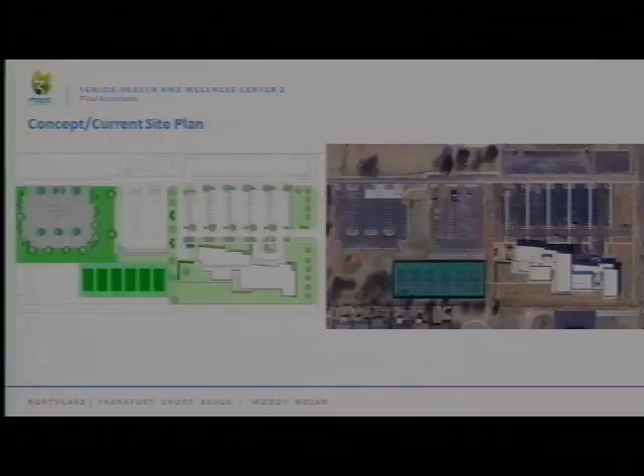Throughout the presentation today, I'm going to show a little bit of what our design was versus what the actualities were. You can see the building there on the lower right-hand side, the southeast corner, really giving it prominence to Walker and bringing it to the front of the east-west site. On the left side of the screen, you can see the tennis courts and the new parking lots that we're having to relocate and add as part of the project to make way for our new facility.

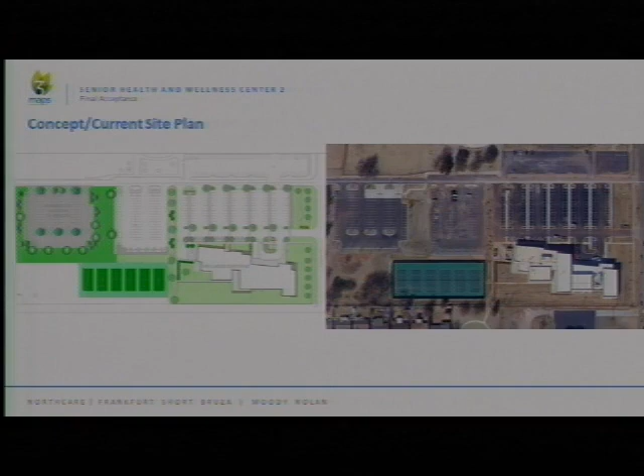This grand aerial view shows the totality of the property. A nice, inviting drive brings you up to the property.

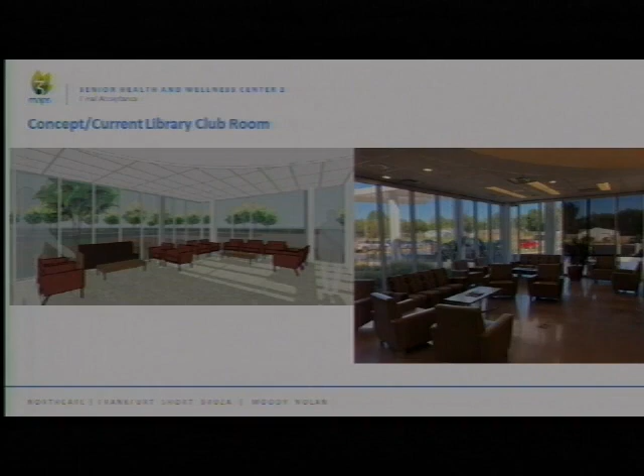When you walk in, this is the first thing you approach - the cafe. To the right of the cafe is a little cyber nook, so you can come use your computer, hang out in the club room right there, and all of that is off of the main lobby.

The main two-story space in the building is the cardio and workout facilities. You can see here the two-story running track on the upper level, and most of the heavy weights down on the ground floor.

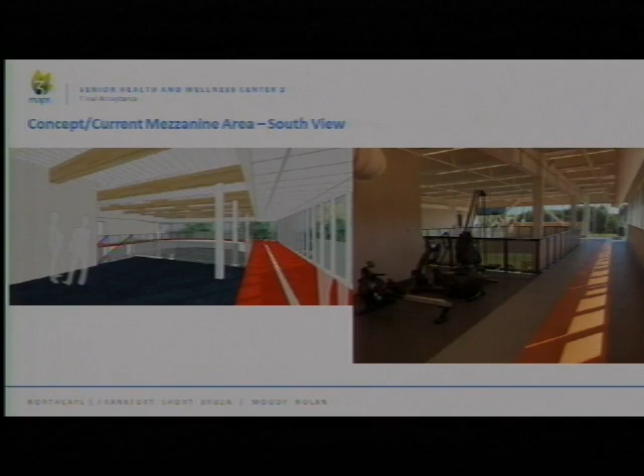Here's a good shot of that track overlooking the back grassy area. It really gives great views to the outside.

Overall, the total construction amount came in right under $11.4 million. We held our grand opening on the 4th.

With that, any questions? Really exciting project. Questions?

Just a comment, Tom. Yesterday at our subcommittee meeting, we learned from NorthCare about the grant they received. It's pretty exciting, right at $1 million, and it will provide transportation services and membership dues for folks 50 or older who are low income and want to go to that center. We also learned the medical part of the clinic is set to open on November 15th.

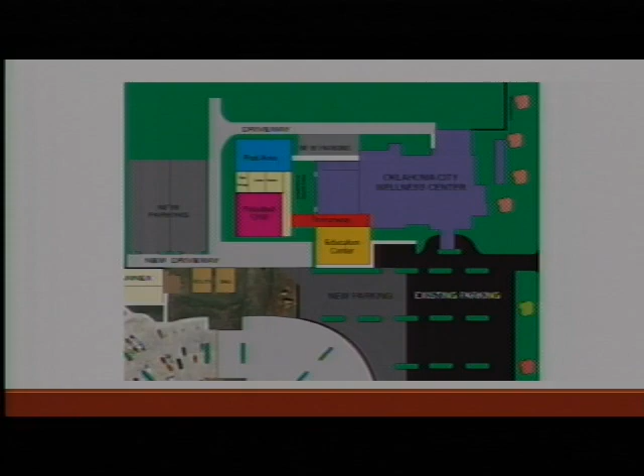This is just an up-close picture of the same, gives you a little bit of detail. We've also included an outdoor sports area for various uses, whether it's croquet or cornhole. I can't tell you how many times I've been hit up for cornhole games the last few weeks, now that the weather's nice. So that would provide another area too.

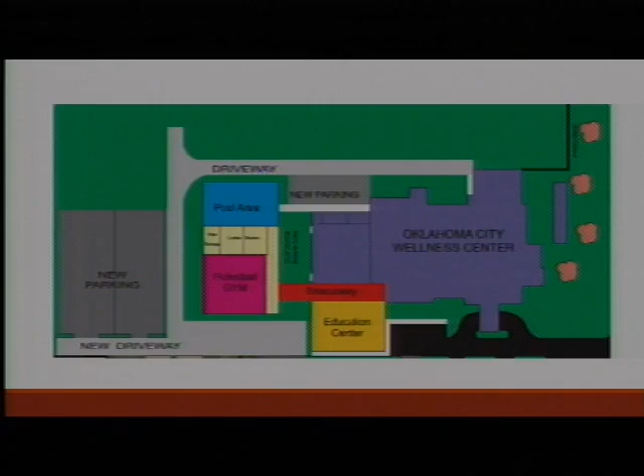So that is what we are considering and what we are respectfully asking your consideration of. I will have Bill Fleming, our chair of the board, come up and talk a little bit about budget.

Thank you, Mr. Chairman, board members, and staff. When we entered into this endeavor several years ago, our goal was to serve the community, and I think we've done that well, and hopefully increased the health of Oklahoma City in general.

The response to Wellness Center #1 has been absolutely amazing. I don't think anyone envisioned what would take place or happen out there. In order to continue the growth, we're going to have to expand the facility. You just saw Claire's presentation on what's happening right now. We're growing at the rate of a couple hundred people a month, and it will continue to grow. That age demographic is increasing, and so we will see more and more demand, I think, on all the wellness centers, and particularly in these zip codes there.

I wanted to share with you very quickly, because we do value your time, where we would spend the $3.5 million that we're requesting. First, we'd want to purchase additional land, and we budgeted approximately $650,000 for that purpose. I will tell you that the church has been approached by someone wanting to build senior housing there and offered $800,000 for that property, and I don't think we need that much property. We can scale that down.

We need to enlarge the parking lot. The original budget number for that, when we first looked at building the parking lot, was about $130,000. That did not include any of the soft costs, and of course, in 2 or 3 years' time, prices have gone up. So we budgeted that at $182,500.

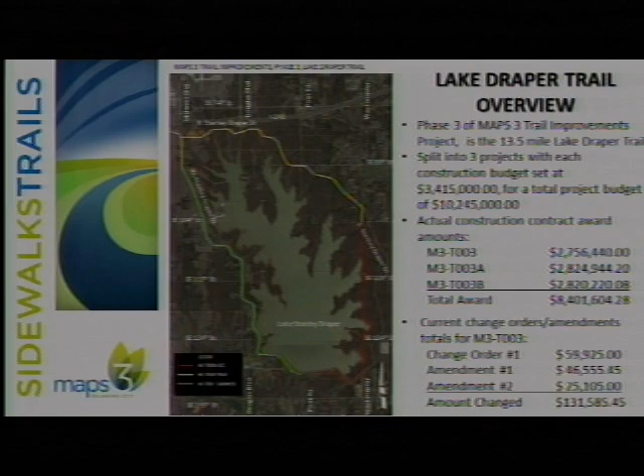Currently, for MAPS Trail M3-T003, the project we're responsible for, we've had a few minor additions and change orders, as shown on the slide. Change order number 1 and amendment number 1 primarily add a new parking facility, a new trailhead located near the marina area. Amendment number 2, as you'll see in a slide later on, addresses additional drainage issues we discovered below the dam after the recent rains in September, August, and now October. Those were primarily because the lake level has gotten a lot higher than when we originally did the survey. We did not realize there were areas of seepage created by the higher water level in the lake that we hadn't addressed. That's what you see with amendment number 2.

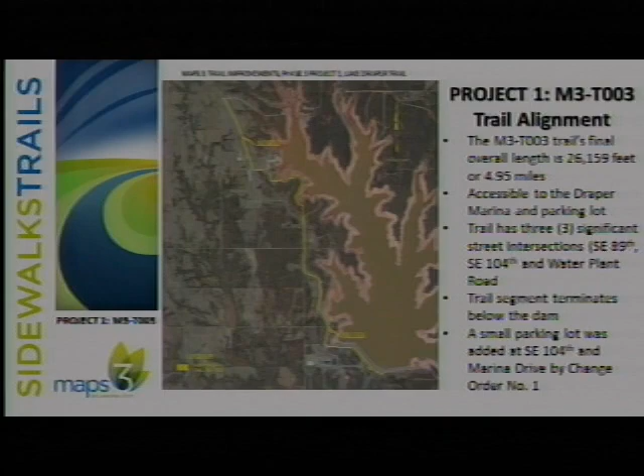So, a little bit about Trail T003: it is the westernmost part of Draper. It starts almost 5 miles, beginning around southeast 89th Street, and progresses south and west along the lake. It has 3 main street crossings: at 89th, southeast 104th, and at Water Plant Road near the dam. Our project terminates below the dam and will tie into CEC Corporation's project at the north end at 89th Street, and into Triad Design Group's project that's going through there. We're also adding a new parking lot with approximately 29 spaces, including 2 handicap spaces, with a connection point to the trail at that location.

The first segment I want to show some of the progress in construction really dates back to when we started doing rough grading back in March, right after the groundbreaking at that point in time.

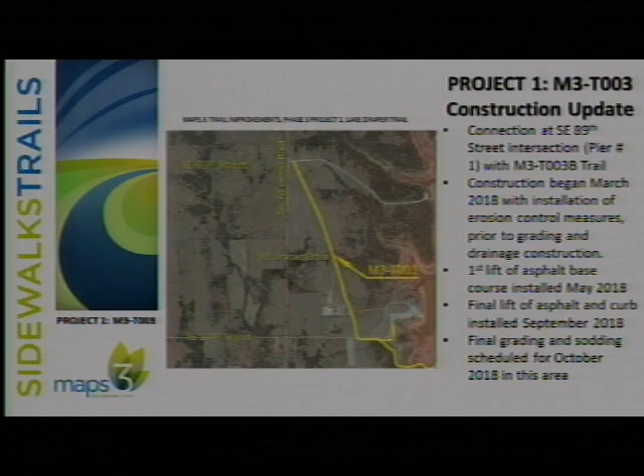Since that time, we've had asphalt laid in May. The final lift of asphalt and curbing on the trail was installed in September, and we look to have final grading and some sod laid down by the end of October now. As of this morning, our construction folks updated me, and based on the wet weather, we're delayed till probably Monday until we start to see some sod laid down adjacent to the trail, not on the trail, to finish that out.

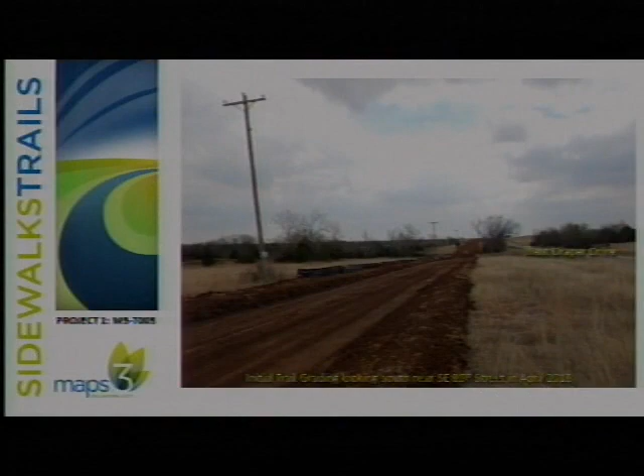What you see here on the right-hand side is West Draper Drive, and you see the proximity of the new trail, the rough grading as it looked back in April of this year. The next slide shows the first base course going down. You'll see the proximity of the trail gets a little bit closer to West Draper Drive.

This gets a little bit closer to the existing marina parking lot. You see the lake in the background, and this is a small spur connection from the existing parking lot, shared with the marina folks, that will spur back over to the main trail.

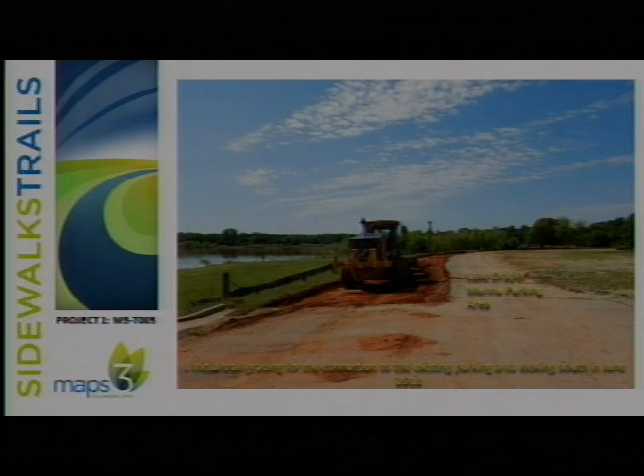The next is the section that the subcommittee had made a recommendation on, the trail alignment, getting a little bit closer to the lake in some areas.

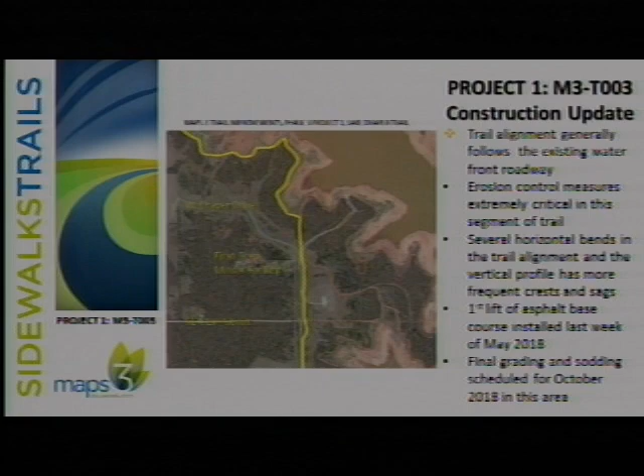In April and May, we did a lot of the grading and the first lift of asphalt. Since then, we're again on schedule for sodding, final grading to be done this month. This is a great look at how close the trail will be adjacent to the lake. This was taken in April, and you notice the lake level is down a little bit. Since that time, the lake has gotten back to its normal water pool elevation.

One of the items in change order number 1 was to add some additional riprap in a location very near this spot to protect against future erosion, if a north wind would create wave action that would erode the bank. So we added some riprap in a location to protect the trail from any future erosion and encroachment.

Again, the close proximity to the lake and the great views you'll be able to see once the trail is completed. This is the location where we had one of the drainage structures installed, near the access point to pier number 4. That was back in April.

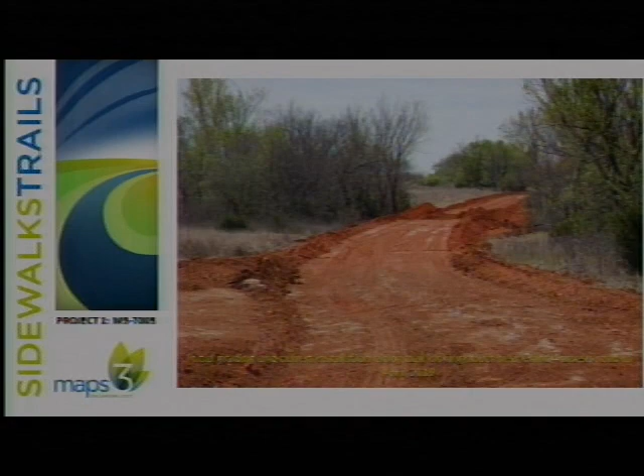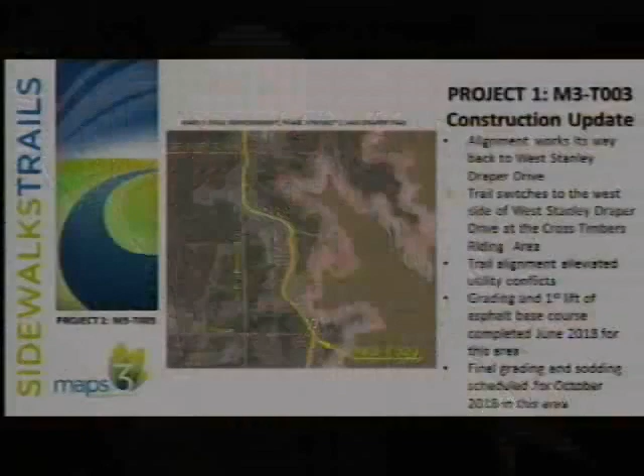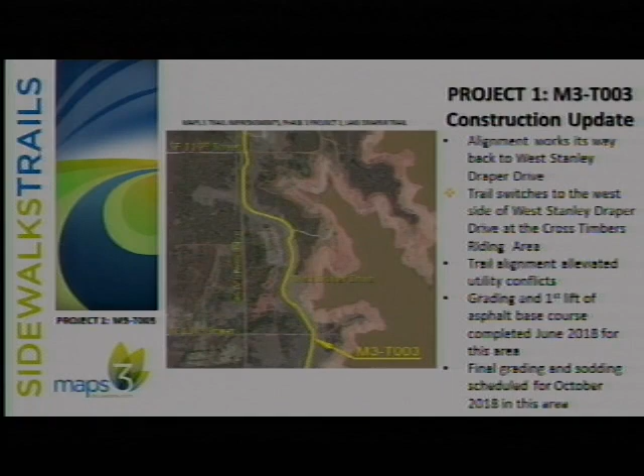The next section is where the trail goes across from the east side of Draper Drive to the west side near the Cross Timbers riding area. Based on the schedule, we look to be complete with final grading and sodding sometime this month through here.

One thing we were adamant about was adjusting the trail alignment to save trees and provide shade in some locations. This photo is a great example where we allowed the contractor and field representative a little leeway on the alignment. It didn't increase the project scope, but we were able to route the trail between some trees and have some meandering through this area near Cross Timbers.

You see the base course and erosion control up, and as we get a little closer, the trail is complete in that area with the exception of where we come up to the crossing at Draper Drive.

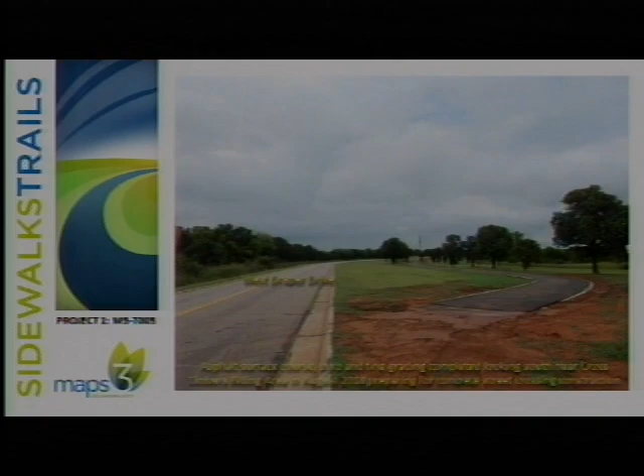One thing we want to emphasize at this Draper Drive crossing is the sightline distance back to the south and north. Trail riders have the opportunity to see traveling vehicles coming towards them as they prepare to cross Draper Drive. Likewise, vehicular drivers have a very good view to see approaching trail riders. We also have advance signing on both Draper Drive and the trail to notify everybody that a crossing is coming up at this location.

The last segment of our area is down near the treatment plant road, where we go below the dam. Most of this work is completed, as you can tell by the schedule.

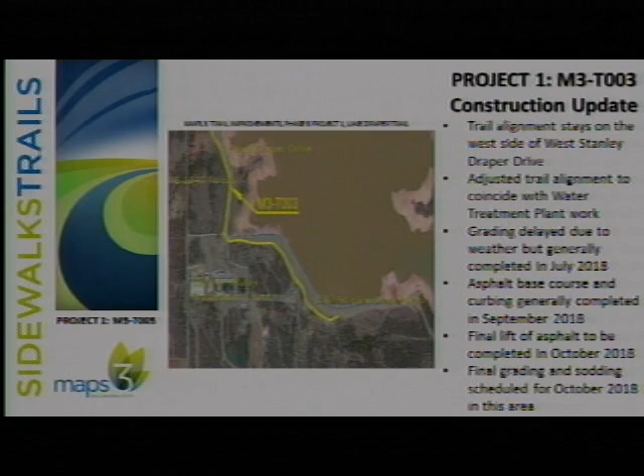Back in July, when it was still relatively dry before the August rains, you see the general layout of the alignment as it goes down below the dam. Then here in September, you notice all the water standing in the foreground with the trail base course already installed. The low spots were originally created with drains, cross drains there, and with the high lake level the hydrostatic pressure pushes water seeping underneath the dam, which is normal.

It's a normal function, I don't want to scare anybody. But we did find a couple of other locations where we thought it prudent to put cross drains underneath the trail and adjust the trail up slightly so we don't have a soft spot potentially developing whenever we have a high lake level.

Here you see it in September when it was a little drier, but in the far view of the picture you see where the construction equipment is working its way up out of the bottom below the dam, back towards the water treatment plant.

Final grading, ready for sod in this area, and it looks like next week is the anticipated construction phase for the sod to be placed.

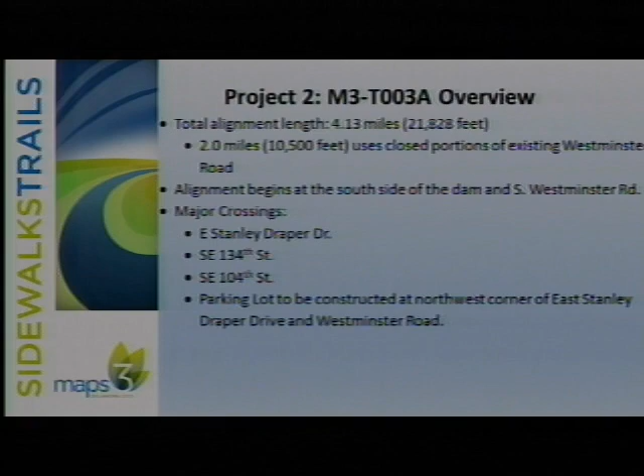Quick overview of the construction cost. The budget is $3.4 million. We are currently up to $2.9 million. We just recently processed an amendment and change order.

The amendment, well, both of these are primarily related to improvements to eliminate all occurrences of sheet flow over the trail. As originally designed, we had permitted small volumes of unconcentrated sheet flow to go across the trail. These changes raise the trail to some degree and create a bar ditch on the uphill side to capture that flow instead of letting it go across the trail, then transmit it to the nearest cross drain and then to the lake. So that will be a big improvement to the project.

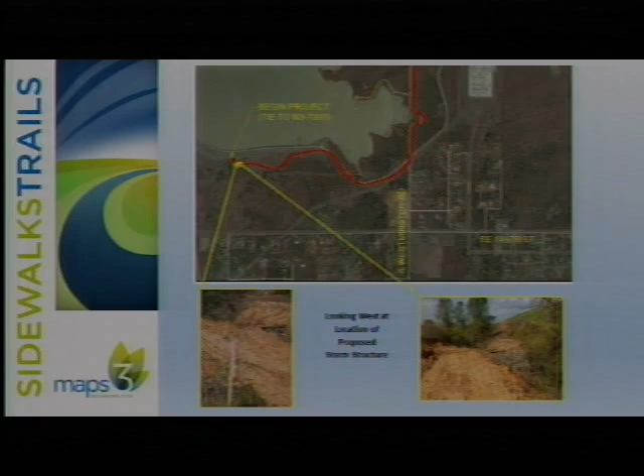We'll go through some pictures here. This is at the south side of the dam. These pictures are a couple weeks old now, so this is kind of rough. CPA has been focusing construction to the north of Stanley Draper Drive, doing a lot of work up there, which we'll see in a second. This is kind of rough grades where we would tie up to the next project.

Some more photos out on the south below the dam. You can see we have the parking lot there where it's going to be built eventually, at Westminster.

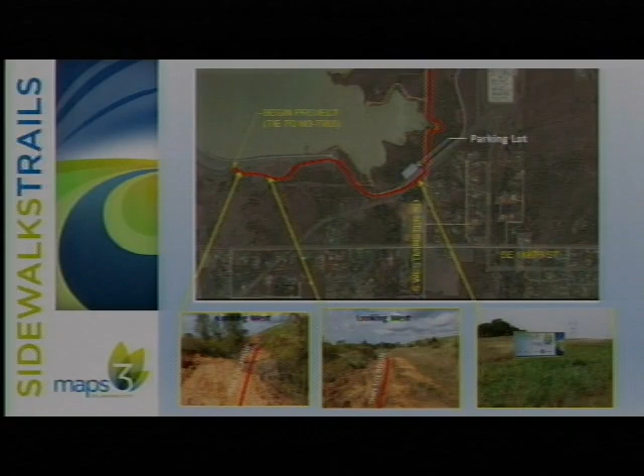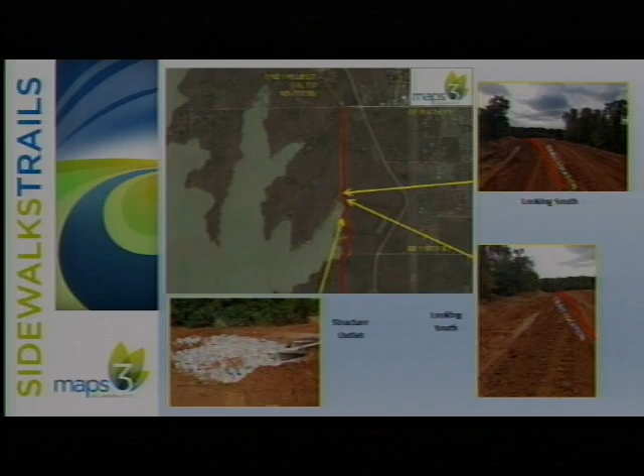Further on, this is the part of the project that's had a lot more progress. You can see where we've highlighted the trail location, where it will roughly be in section. A storm structure was constructed there. They've made a lot of progress in this area on the north side of Stanley Draper Drive, and they're looking to start subgrade stabilization efforts soon. Some more photos just showing they've got the grade up to where the stabilization needs to be put in place, and they will soon be moving on to asphalt and curb installation.

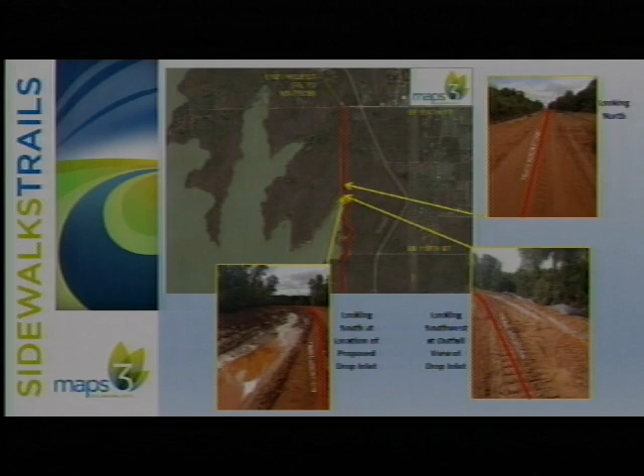The current schedule is that grading and drainage will be completed in November of this year. Concrete curbing and the first lift of asphalt is anticipated in December and early January, with the final asphalt procedures being finished in January, and then final completion of the project in February of next year.

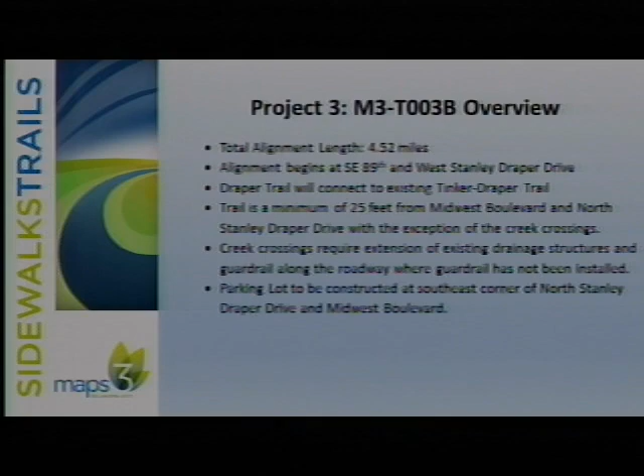As Mr. Cavan pointed out, our trail is a minimum of 25 feet from the road, or greater in most instances, for the clear zone from the cars. Where we do come in closer to the road, there are several creek crossings, so there's either existing guardrail or we're installing guardrail. We also have a parking lot at the southeast corner of North Stanley Draper Drive and Midwest Boulevard, about 20 parking spaces, 2 handicap spaces. There was no electrical power in that area, so we will be using solar lighting that the city can put on a timer.

And so we'll move forward. Our original construction amount was $2.8 million. Last month, you approved amendment number 1, which added about 800 feet of 18-inch concrete pipe.

Once we got started and cleared, we had some initial meetings, and the Parks Department was there. Through their request, we went back and looked at our trail design. They really wanted to minimize water over the trail. The original design blended the trail into the environment. We did have bar ditches and concrete pipes, but they wanted us to go further and really get the water off the trail.

This last month, we have gone back through our plans. We have added more ditches on each side of the trail. Next month, we will come back with another amendment to take care of the earthwork and probably a few other drainage pipes.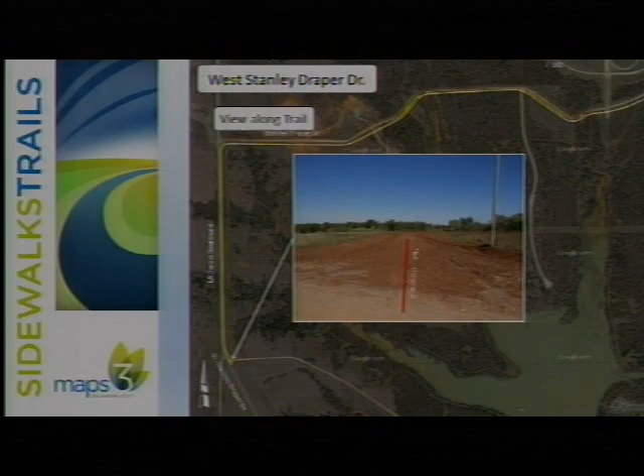This section is pretty well graded. Here's the section where we came in and extended a drainage structure for the trail to go over. And again, all these pictures are going to kind of look alike. This is looking east down Stanley Draper Drive.

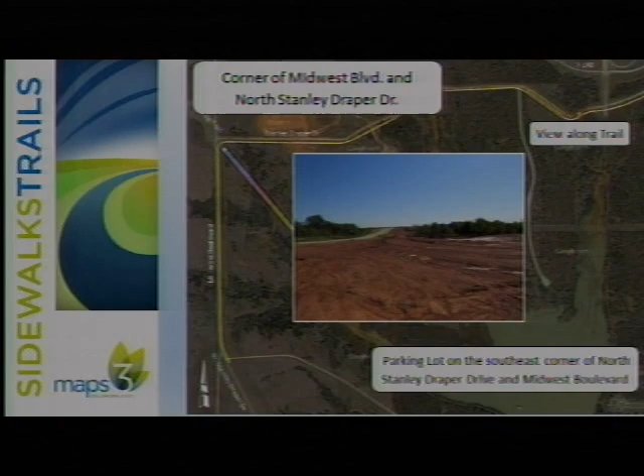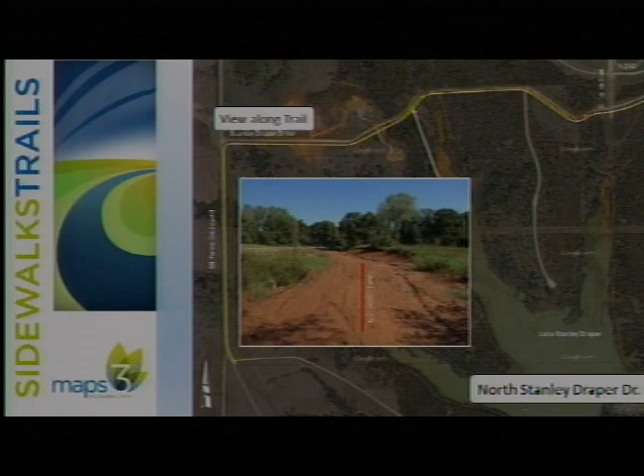This section is pretty well graded. To my right, not the whole area is shown, but that is where the parking lot will be. Again, this is just looking east down Stanley Draper Drive. This is a section as we meander through the trees, with the trail going along the road.

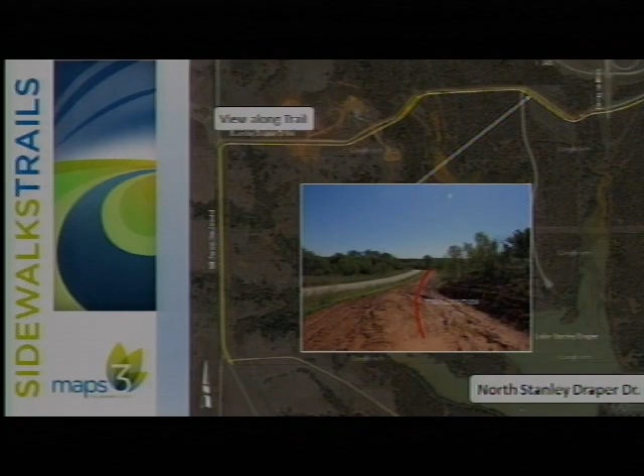Here's a section of the trail that is pretty well complete. They'll come back in on the right side, and they still need to finish the bar ditches. Here's an example of some cross drains that we had to extend, and as you can see there was already existing guardrail there.

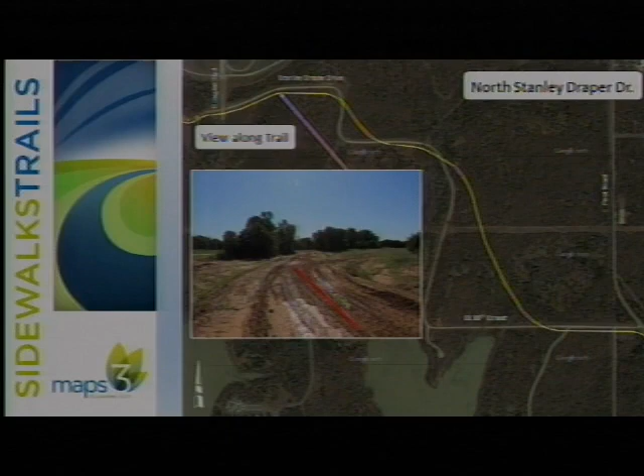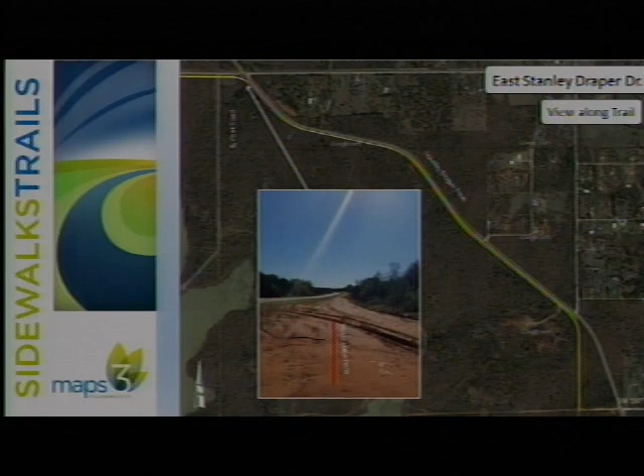Again, just another picture of the trail with the road and trees meandering through in some areas. Pretty much along Stanley Draper Drive as we go south to the end of the project, we are paralleling the road, mainly due to all the vegetation and trees. So we wanted to clear that area to make it safe and visible for the trail users.

Again, this is just another section. This is an example of where the water was going to sheet flow from the road about 25 feet over the trail, but the Parks Department was adamant that we go in there and add bar ditches. So that's what we've been doing.

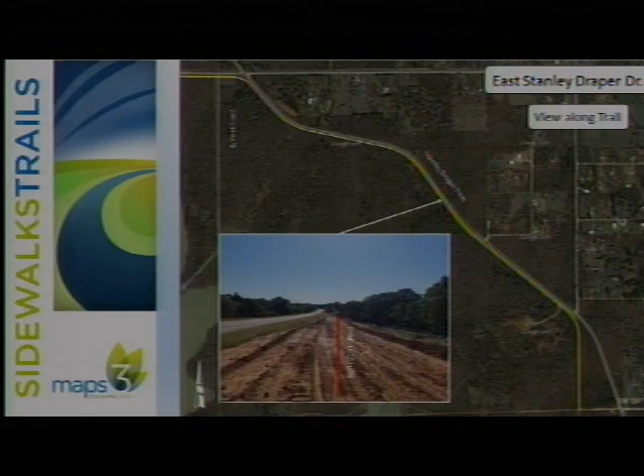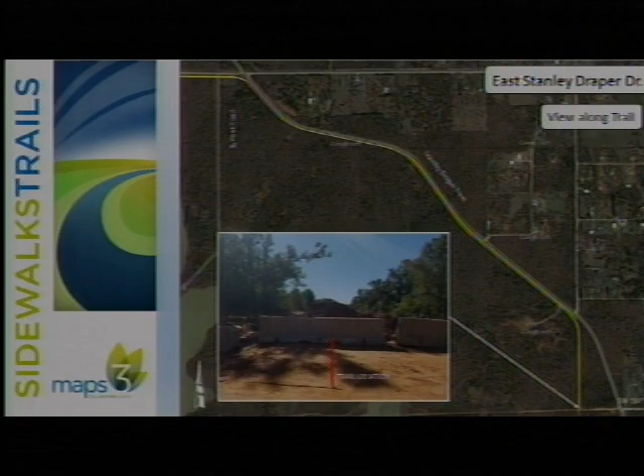And this is the end of the project where we tie to the Phase 2 trail. Our current contract completion date is the end of January. That will probably get extended a little bit to give them some extra time to complete the earthwork.

So if anybody has any questions, I would be glad to answer them. Questions? Thank you, really appreciate you being here. All right, have a good day.